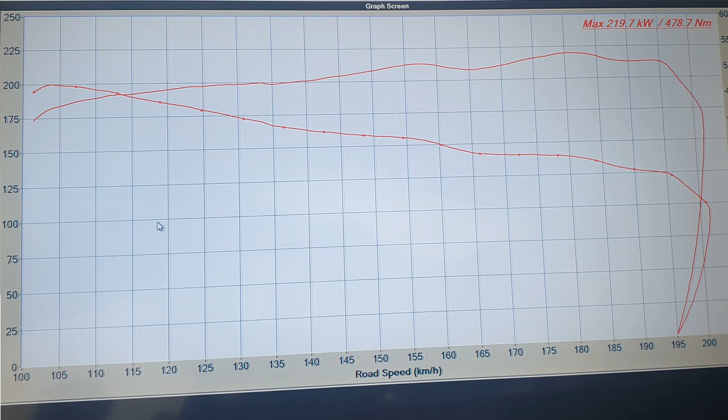On that dyno it made 219.7, we'll just call it 220 kilowatt, much the same as the other dyno. Different day, different dyno, what's 5 kilowatt between friends. So this afternoon, finish work, we'll roll this on, see how much power this thing makes.

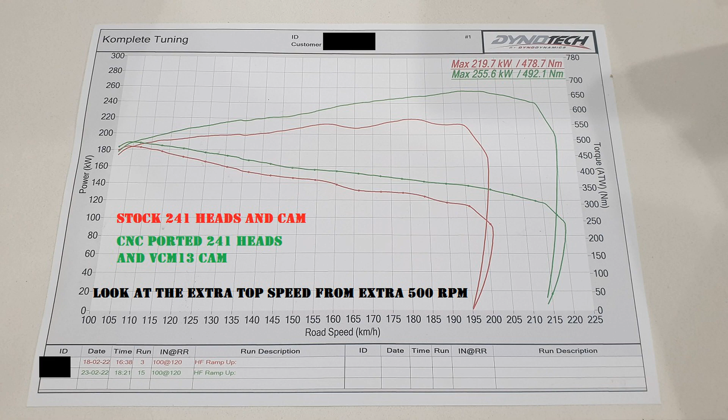I did film an outro on the way home, but it was too dark and the audio was a bit crap, so I'm redoing it. Dyno session went really well.

On the fuel side, AFR was perfect on every run. I didn't even have to touch the carby. It was idling at 14 to 1, and through the run it was like 12.5 flat through the whole thing. I couldn't believe it, didn't have to touch the carby at all.

It was perfect. Timing, I went in a bit of a circle. I started at 28, bumped it up to 30, made a little bit more power, went to 32, made no difference, went back down to 30, I was back to normal.

One thing I forgot about - generally your first dyno run on a petrol car will be down on power because you've got a lot of street miles on the plugs, it's not quite up to temp, all these sort of things come into it. So I remembered that, put it down to 28, made exactly the same power. Put it down to 26, made exactly the same power within 1 or 2 - like dyno variation, temperature and crap.

Put it down to 24 and it lost, I think, 3 kilowatt or something. It was stuff all, really. So I bumped it back up to 26 and just left it there.

When I go to spray it, I'm going to do that all again. I'm going to start really low, like maybe 18 or 20 degrees. Start really low, bump it up 2 at a time, and find the absolute sweet spot before I spray it, because that's pretty important.